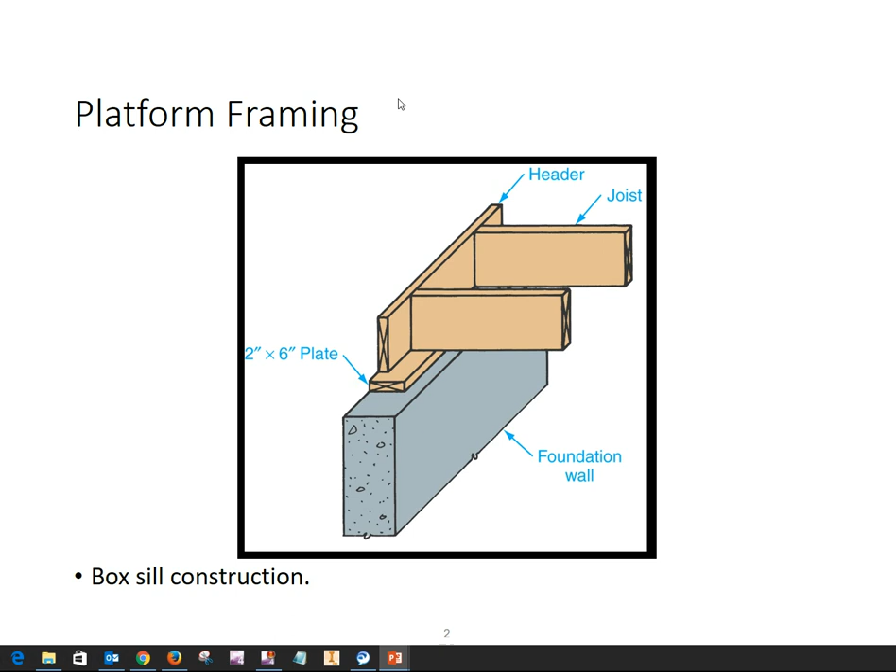Okay, and so here's a section view of the entire floor and wall system, so you can kind of see how it goes. How the wall is built on top of the floor, and it's actually built laid down and then stood up. Most of the time, they tilt it up and get all the walls in and braced, and then they build the second floor on top of that and go on up.

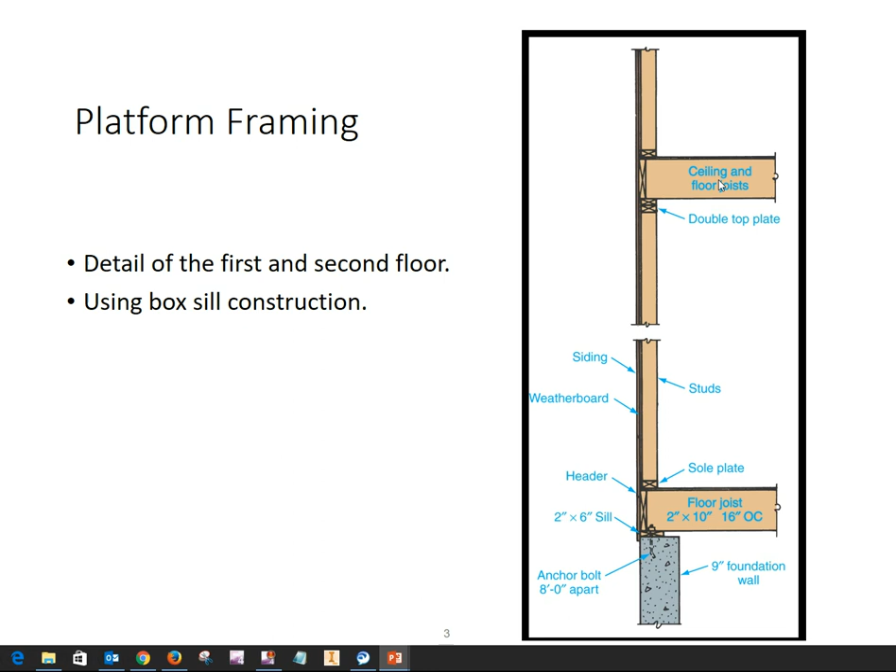Well, with balloon framing, you still have a sill plate or a mud sill, and then the studs rest on the sill plate and go all the way to the top plate where the roof is going to rest. Floor studs, there's a couple of different ways of doing that, but you have to provide fire stopping so that any fire under the floor or within the floor system cannot get into the wall and go up in the wall like a chimney.

A couple of advantages to this type of construction is that you have limited shrinkage because the building is not resting on the side grain of a piece of lumber. Okay, because when lumber shrinks, it shrinks more in this direction than it does in this direction. A disadvantage to it, there's more work involved in adding the fire stops, and it's more difficult to construct because you do not have a platform to stand on as you're building this thing.

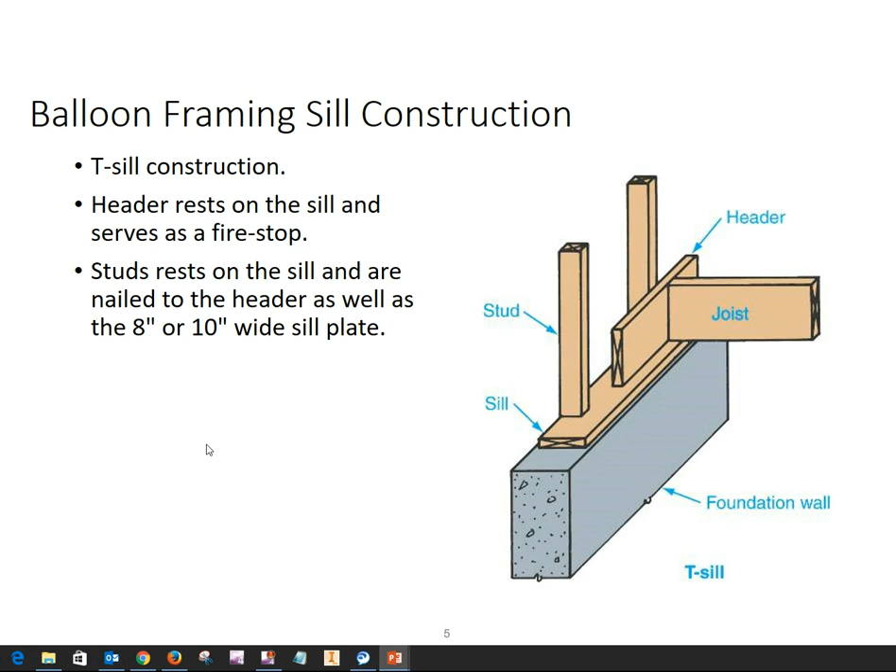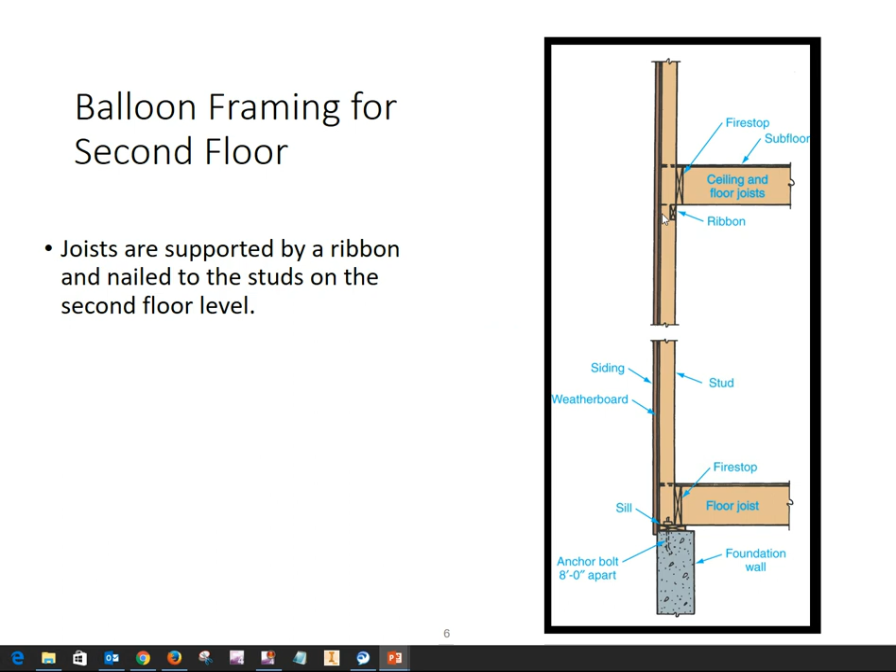Here's another example where the sill plate would be larger, and you actually put a header in and a joist, so it's almost like platform framing, but it is a little different, at least on the first floor here. Okay, once you get up to the second floor, now you have to install what's called a ribbon, which is actually notched into the studs, and the ceiling joists go into the stud cavity and rest on that. It's a little more difficult to construct.

Okay, joists and beams. The joist is the support for the floor, and almost all building materials, as far as framing goes, are made out of softwoods. Here in the South, we typically use southern yellow pine for floor and roof framing, and then we use what's known as SPF or spruce pine fir for wall studs. Okay, there's other varieties available, but that's kind of the common.

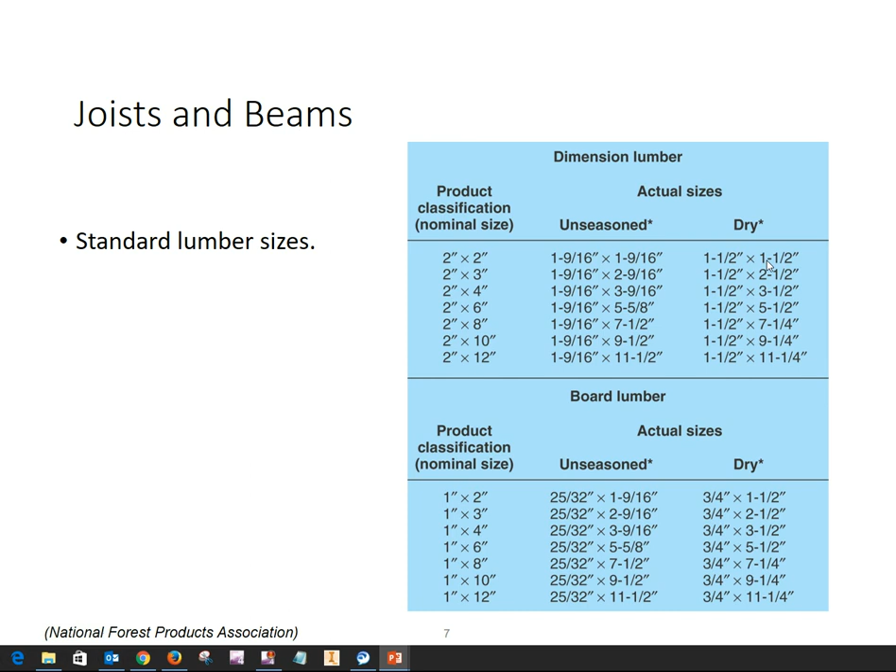Now, this is a chart from the book that I've told you before that you need to memorize as far as the sizing of our framing materials. What you need to know is the dry size over here. So a 2x6 measures 1.5 by 5.5. Okay, so in doing CAD designs, the dry size is the size we use as we're drawing these things.

Okay, how do you know what size floor joist to use? Well, building codes provide floor joist and roof joist and rafter span data tables. And this is just an example; there's a couple of examples here in the slideshow. There's several in your textbook, but they're based on the type of wood used, okay?

The grade of the wood, and the lumber is graded based on the grain, the tightness of the grain, the number of knots, the tightness of the knots, and things like that. So it's graded as to how strong it is, okay? And then the charts are based on the amount of live load and dead load. Okay, dead load is pretty consistent.

That's the building itself. But the live load, you might have a higher live load in say a kitchen area than you might have in a bedroom area. A bathroom would have a higher live load than a hallway because the room has the capability to weigh more than another room. Okay, and then they're also based on deflection.

And deflection of 360 is pretty common. That's 1/360th of the span would be the deflection in the center of the joist once it's fully loaded. Okay, so here's an example, and you'll have the different sizes of joist, and then the spacing. 12, 16, and 24 are the common spacing for floor joist. And then each one tells you based on the type of lumber, how far it can span at that spacing. Okay.

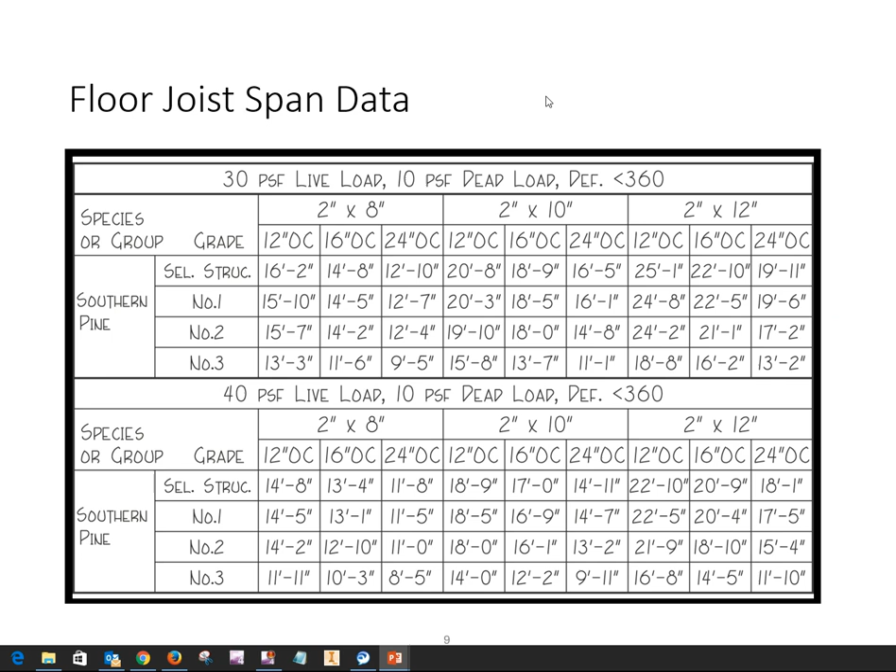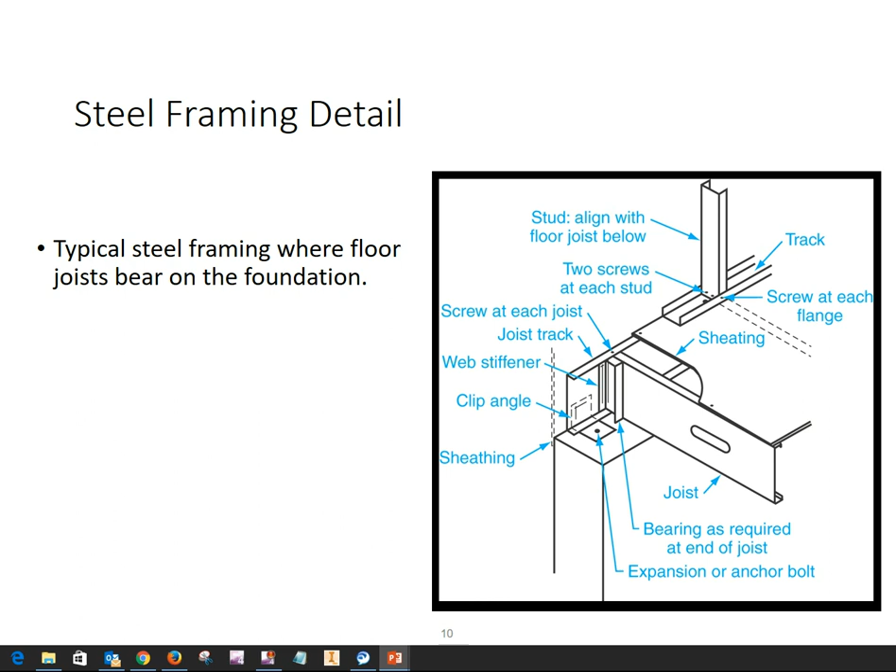Okay, so there's also steel framing that we can use. You'll see this a lot in commercial construction, but you sometimes see it in residential, in which the floor joist and the framing is metal C channels. They're kind of a C shape, and then metal wall studs and metal tracks. So everything is metal. It makes it fireproof. It's a consistent size, but you can't cut it and nail it like you would traditional wood. But it is out there, and it is common in commercial.

So our floor joists, on one end, they're supported at the wall. Well, if the building is too deep for our joist size, then we have to put a beam down the center. And the beams can be built of solid timber. They can be built up of multiple layers of framing lumber. They can be metal, or they could be engineered wood. There's quite a number of different ones, and these are just examples of how you could connect your floor joist to the beams.